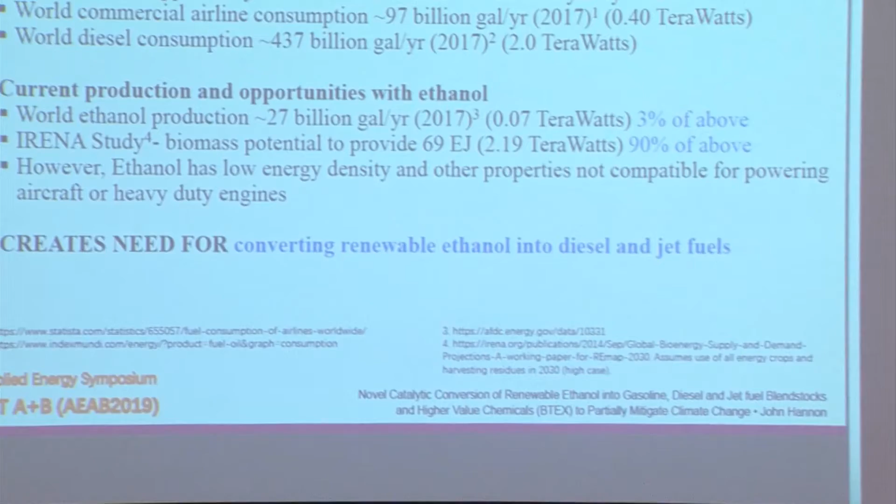We're looking at heavy-duty transportation vehicles here, airline consumption, 97 billion gallons per year, 2017, which represents roughly 0.4 terawatts. Terawatts being 1 times 10 to the 12th watts. World diesel consumption, just short of 450 billion gallons per year, representing about 2 terawatts. So that's what's used out there now.

The only, and we're shifting gears to down here, the only real impact we've made for biofuels over the past, say, 4 decades has been with ethanol. So with ethanol, the world production is roughly 27 billion gallons per year, but that only represents about 3% of the requirements that are above for heavy-duty vehicles on an energy basis.

There are studies out there, the billion-ton study in the U.S., as well as this recent IRENA study, that mention that the biomass potential is huge out there. So if you convert all that biomass into ethanol, you can reach about 90% of the above requirements. However, ethanol has low energy density, and it doesn't have suitable properties for powering aircraft and heavy-duty

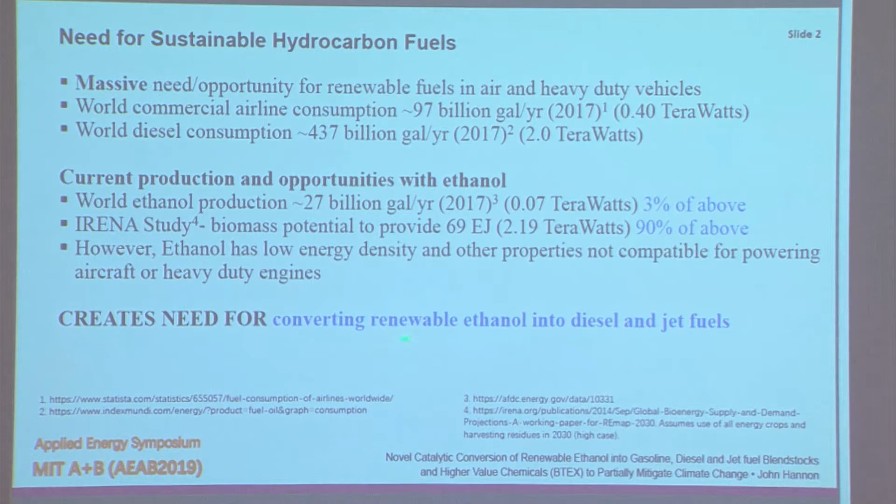engines. So it really begs the need for, okay, are there ways to convert ethanol into these other fuels? And so this is where we come along, Vertimass. So we licensed the technology from Oak Ridge National Laboratory; they invented this catalyst that converts ethanol into these heavy-duty fuels. We call it the consolidated alcohol dehydration and oligomerization process, in short, the CADO process,

where you take ethanol, it can be hydrous or anhydrous ethanol that comes through. We send it through a vapor phase heterogeneous catalysis with low-cost metal exchanged zeolite catalysts, and we produce a combination of aromatic and aliphatic hydrocarbons. We call it a blend stock. Currently, the blend is about a C4 through C12 hydrocarbon.

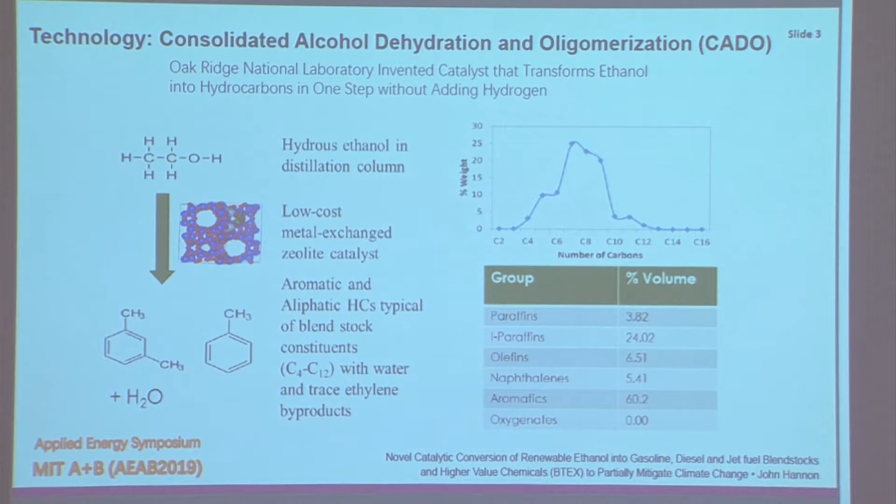You can see how it maps out here on the hydrocarbon. We have a significant amount of aromatics in this, as well as paraffins. So it's a combination. I'll get into this in a little bit more detail. But that's the basics of the technology.

And so if you look just schematically, what this now enables is ethanol producers, existing or new facilities that take in biomass or corn or sugarcane. They ferment it to make their broth and then distill it off. Now the ethanol producer has the ability to make ethanol if they want to, or they can run it through our CADO converter to make these different fuels.

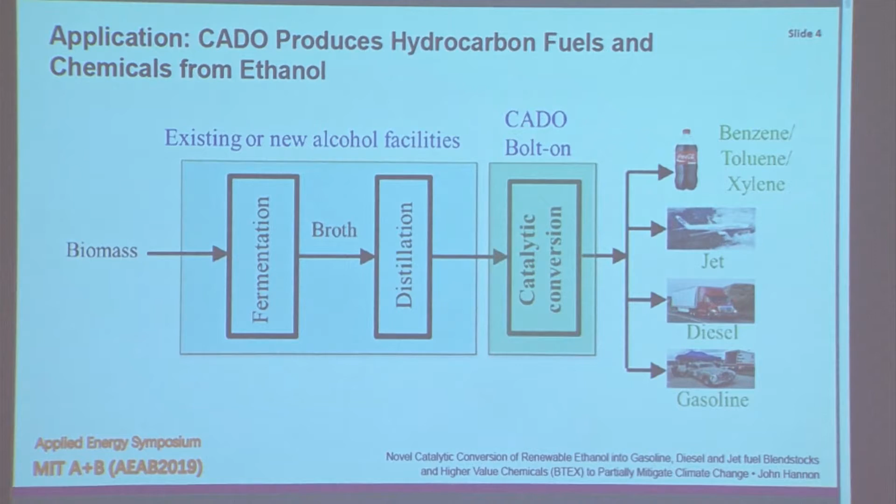So you can make gasoline, diesel, jet fuel, as well as this plastic precursor BTEX, benzene, toluene, xylene. There's ethylbenzene in there as well. These are used typically to make plastics. There's hundreds of uses of these chemicals. But that's in a schematic what this technology now enables.

So I'll talk a little bit about some of the technical advantages of this technology, as well as some of the commercial advantages. So some of the technical advantages are: it's a single cell, it's a single reaction system, okay? We've seen attempts at alcohol to jet or alcohol to hydrocarbons in the past, and these have typically been 3 to 4 step processes. We also have complete conversion of ethanol. All the ethanol converts into hydrocarbons and water.

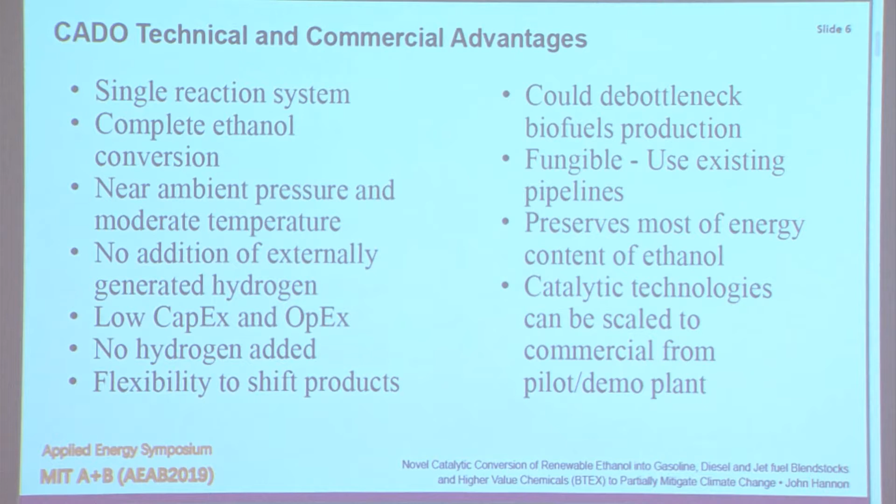So on the commercial advantages, we find in talking to ethanol producers out there today is that this technology can actually, in a lot of the plants, de-bottleneck it. A lot of these plants have bottlenecks at the distillation or rectification column. This allows them to de-bottleneck and actually make more product overall. It's fungible, to go to Buzz's comment about the ethanol not being able to go into the pipelines, where this can, because this is now a hydrocarbon product. As I mentioned, it preserves most of the energy content of the ethanol that is sent in. And then the other interesting piece I'll get into in a bit is this technology can be scaled up commercially from the current demonstration reactor.

So I mentioned we license this from Oak Ridge National Labs. It's a 1-step versus 3 to 4 for others. Very positive freedom to operate. We licensed 5 initial patents back in 2014. On top of that, we've added 5 more. 1 has been recently issued. We have 4 more under review. And then we have some funding support from the Department of Energy, BETO office, as well as the ChemCat Bio program, which allows us to really characterize a catalyst with all the sophisticated tools across the national labs.

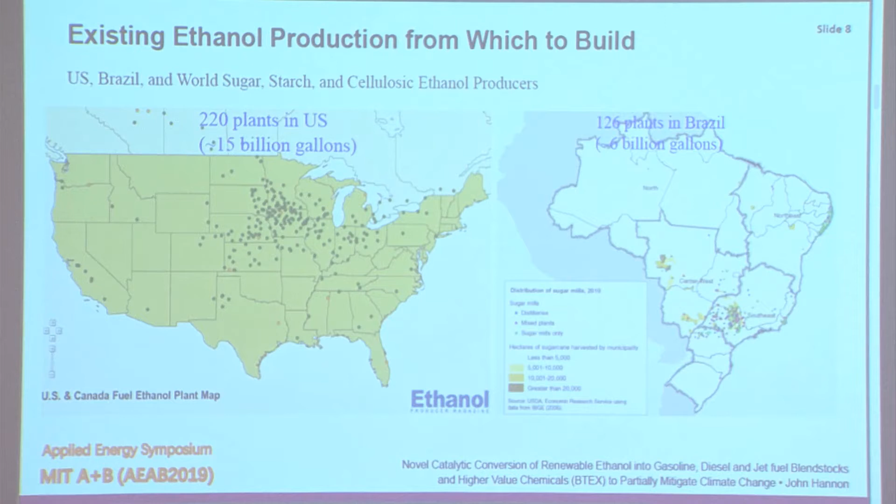So that's Vertimass. One nice thing we love about this is that we really can launch from a solid platform that's out there already. In the United States, about 220 ethanol plants producing about 15 billion gallons per year. There's only a couple cellulosic ethanol producers in this mix, but it's predominantly first generation or starch ethanol production. And then in Brazil, we get about 6 billion gallons total from 126 plants, and you can see how they're scattered about. This really gives us a nice platform to launch from, to start integrating our bolt-on onto these facilities to start making these renewable hydrocarbon products.

When we were awarded the Department of Energy award, we looked around for companies that could help us scale up this technology, and Technip FMC was right on the list. They're actually just around here in the Boston area. What we really liked about them is they've got about 4 decades of experience scaling up catalytic technologies like this. They've commercialized 20 processes from this laboratory that we're working with now. So they have a great success rate, and they also have the capabilities of large engineering firms, so they can provide engineering, procurement, and construction, or EPC packages.

And the other neat thing that we really liked is they're able to scale up commercially directly from this demonstration reactor that we're working with. So they can guarantee this scale up. That's a big game changer, because typically in other processes you'd have to have a unit that's installed in the field, and that usually bleeds you of finances. So being able to go directly to commercial is huge.

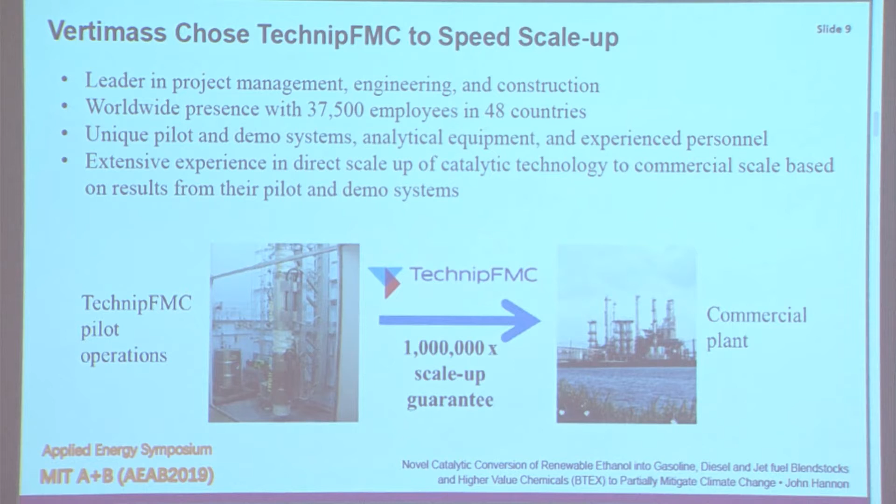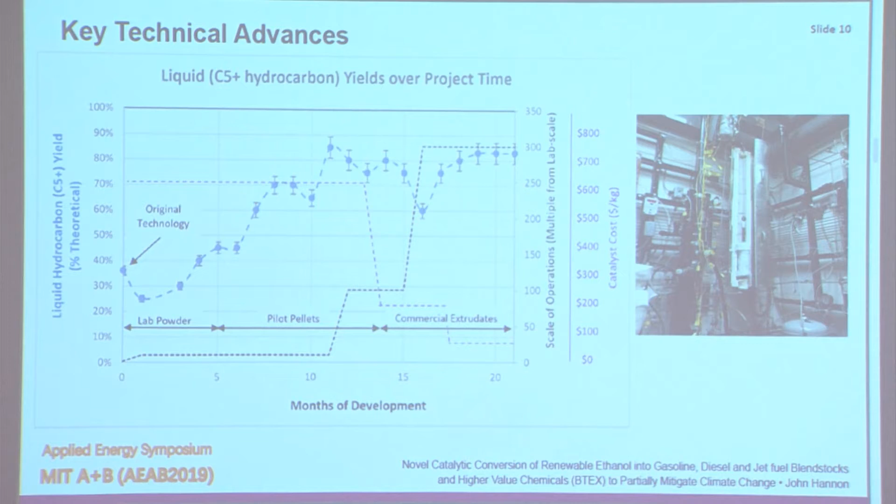Okay, so I'll cover this a little bit quickly here. So 2 graphs here just to show you the type of products that we have, the CADO reactor products. On the left here, this is an example of hours on stream of operation. Okay, so this is 0 to 70 hours. The dashed vertical lines represent the regeneration times, and then you can see how the product distributions look. This is liquid hydrocarbon yields. The green dots are the BTEX yields, and then we look at methane and a whole bunch of different other products that are in there that I'm not showing.

And then, if you do take a sample of this C5+ liquid, this is what the profile typically looks like, going from a C4 hydrocarbon to C12, and it's broken down by color here, aromatics being the predominant one in blue, followed by aliphatics and olefins. So that gives you an idea of the breakdown of the liquid.

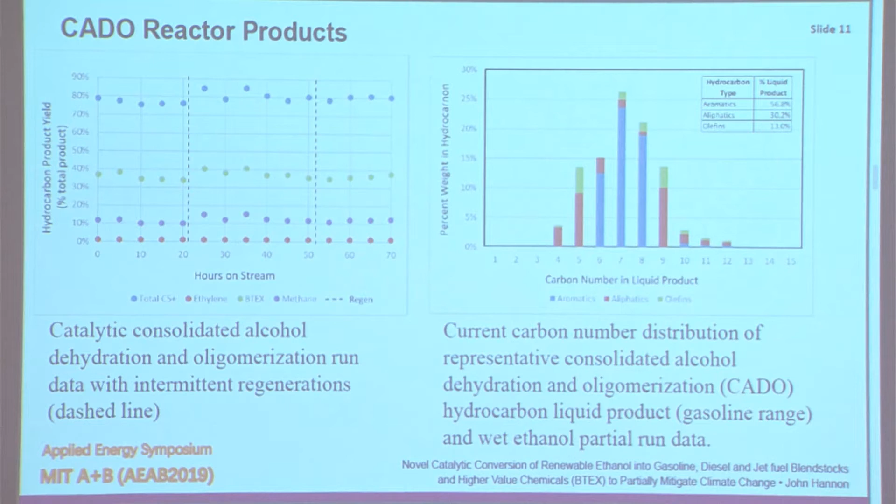The other thing we did in this recent study was look at 2 things, and Lee alluded to this during his presentation, but if you look at this complete top box, this is the ethanol production process. You get your process up front, and this is more the downstream processing where it goes through a beer column, rectification, molecular sieves, and you get your 100% ethanol product. That's BAU, business as usual.

This bottom piece here is, okay, how would we integrate our CADO bolt-on into this system? We have 2 blocks shown here with some heat exchangers, a reactor decanter, and we make our fungible fuel blend stocks. And this is how we see it integrating, with a little bit of heat integration. And then we look at a feedstock of 40% ethanol, which is typically what you'd see off a beer column vapor. Those are the 2 scenarios. So we're looking at 100% ethanol and comparing that to how much it costs to make fungible fuels.

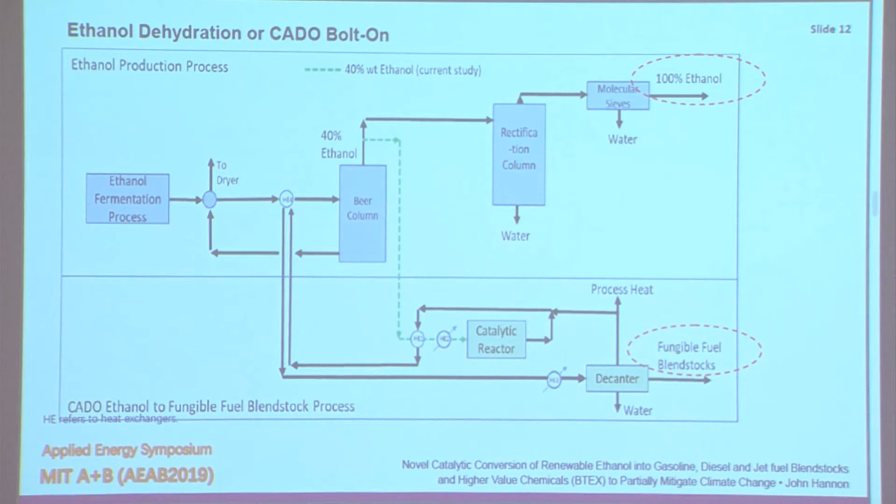And what we found is, looking at the y-axis here, when we started off, it was about $24 per gigajoule. And just to give you a sense, it's about $1.25 per gallon for just the conversion process. Over the development process, we were able to take that down in about 2 years to about 1/10 of that. So we're down at about $2 per gigajoule, or just about 10 cents per gallon for the conversion process.

We project that we're going to be able to get even lower, to about $1.44. And as Lee mentioned, this is very important because to take 40% ethanol and to convert that to 100% ethanol requires $1.46 per gigajoule, where we're currently at 2, targeting 1.44.

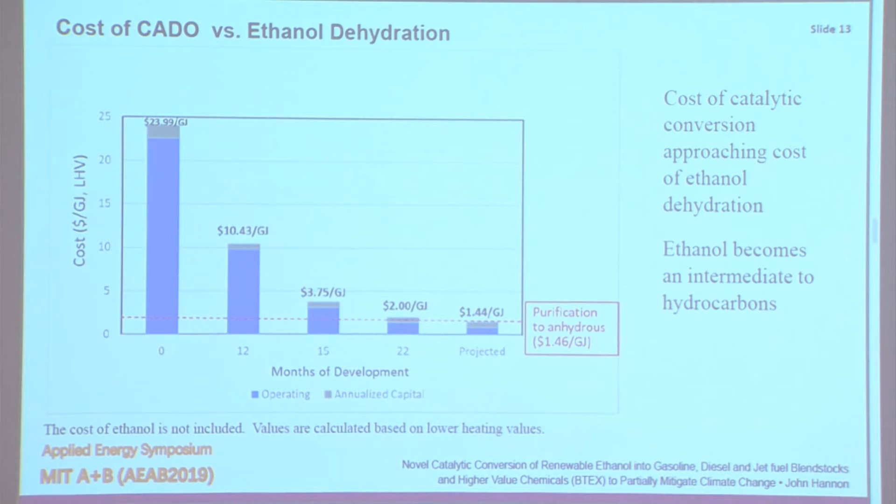So what we're saying is that there's the same amount of cost to take 40% ethanol to anhydrous ethanol. It's the same as taking that 40% ethanol and converting it to hydrocarbons. So this kind of just shows you here, same thing, 146 for this conversion process here. Now we're at $2 for this conversion, taking that 40% ethanol and upgrading it, and 144 projected. And the key here is the ethanol is now not really a product, it's an intermediate. So think of it in that sense.

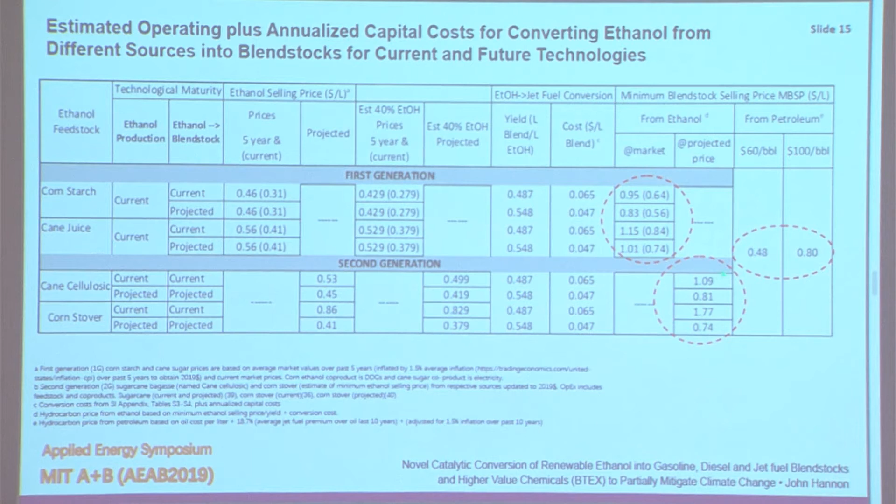The other thing we looked at was, okay, so you can do this, how competitive is it with petroleum-based hydrocarbons? We've done a lot of numbers here, but I'll just cut to the chase. If you compare it to petroleum, which these are in dollars per liter, so 0.48 at $60 per barrel oil and $0.8 per liter at $100 per barrel oil, what we find is that almost none of these technologies compete at $100 per barrel oil without any incentives. It's very challenging though. None of them compete at $60 per barrel without incentives.

Now let's talk about incentives. There are incentives out there. On the left are the incentives that exist. So you've got D3 RINs for cellulosic ethanol, D5 RINs for sugarcane ethanol, and D6 RINs for corn ethanol. And there's also the California Low Carbon Fuel Standard. These are current incentives that are out there. And then there are other incentives that may be coming down the line. So we have a $100 per ton CO2 incentive that we looked at, as well as this oil industry shadow price where they look at $40 per ton CO2.

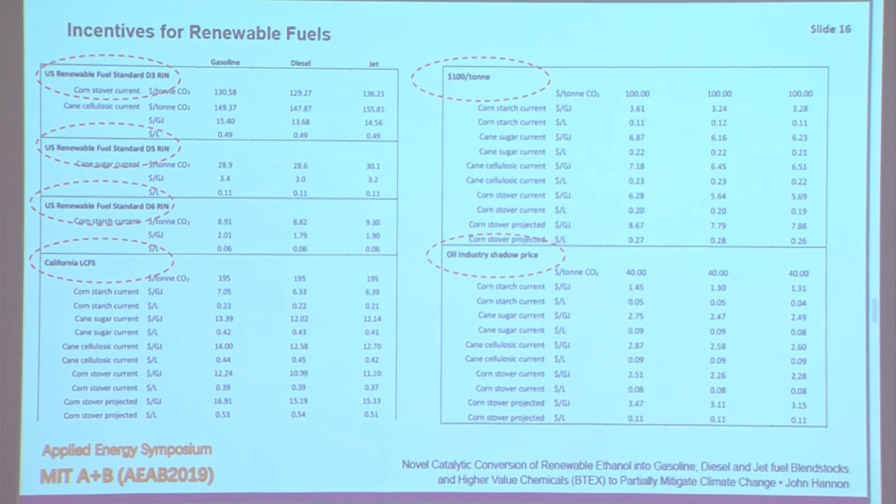The other thing we look at: all these prices are changing all the time, gasoline, diesel, jet fuel prices, as well as ethanol and certainly corn. These prices change over time. So we say, okay, if we do a look back, say over a 5-year time period, if the ethanol producer had this technology, would they be able to make money with it? And what we find is that yes, there are these windows of opportunity highlighted here in the greenish color, where if they do operate the bolt-on, their margins just skyrocket. So you can see huge margin increases, 30, 40% for these different opportunity zones.

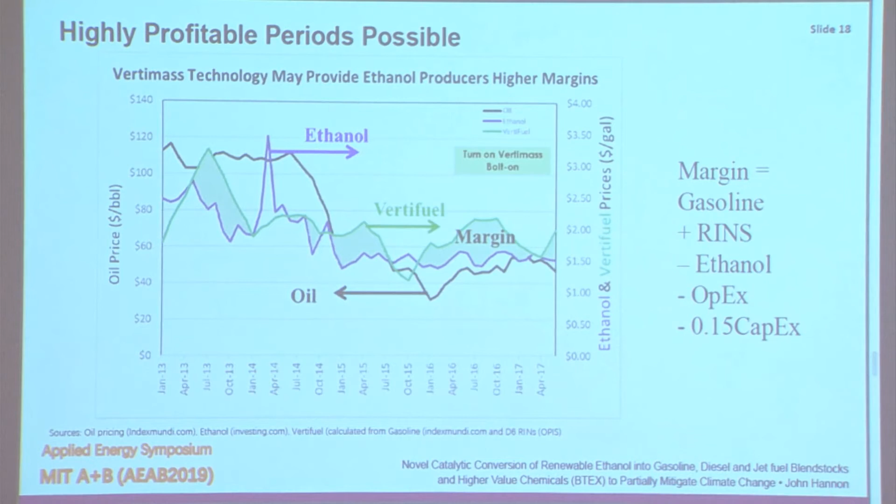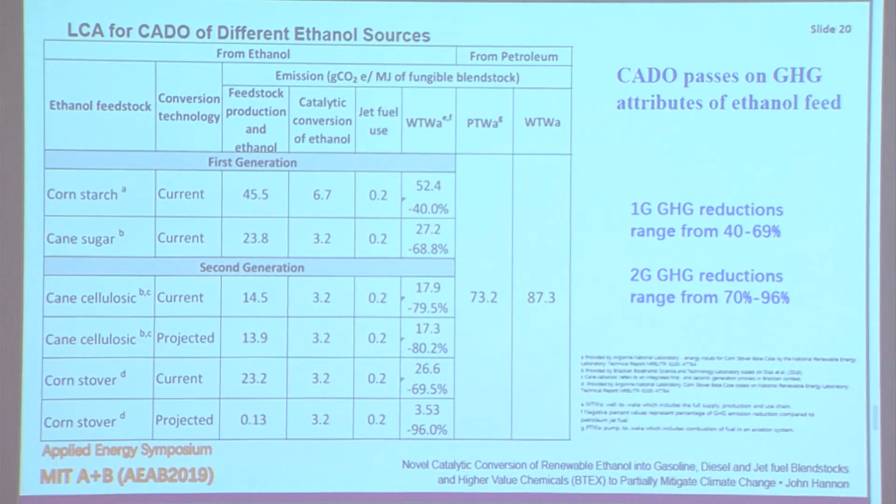We talked about the economics, and the last segment is about the life cycle analysis. So we work with Argonne National Labs to look at how the greenhouse gas emissions look, and this is just a schematic of the flows. And what we find is, for first generation, corn starch and cane sugar offer 40 to 69% greenhouse gas reductions. Moving to second generation production, it ranges from 70 to 96%. So really good looking greenhouse gas reductions.

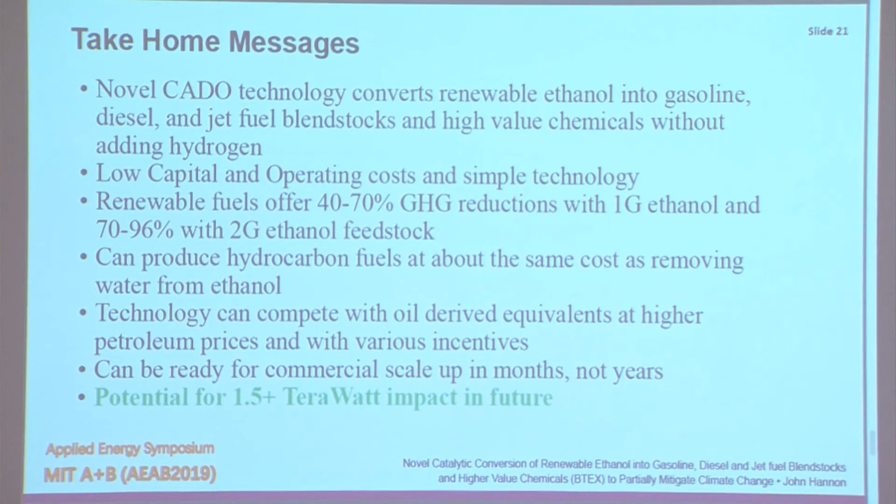And this is my final slide, just a recap, take home messages: this technology allows ethanol producers now to make gasoline, diesel, and jet fuel and higher value chemicals without adding hydrogen. It's a low CapEx, OpEx solution. As I mentioned, the greenhouse gas reductions are roughly 40 to 70% for first generation and 70 to 96% for second generation.

And the other interesting piece of that paper was, you know, you can produce hydrocarbon fuels now at the same cost as removing water from ethanol. These technologies can compete with oil prices, especially with the incentives. And then we're really close to commercialization. I mean, we've done this now for just over 24 months for the study. And so we're really close, about 4 or 5 months before we're ready to commercialize.

And then the potential here is huge. Potential for 1.5 plus terawatt impacts in the future. So that's all I have. Thank you so much for listening.

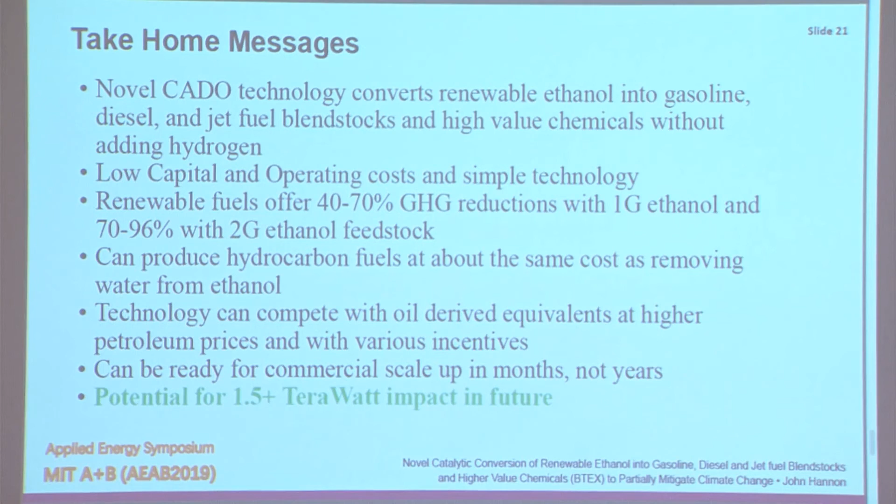We have time for a couple of questions. Thank you. Thanks so much for that talk. That's really, you know, promising. For this to have an impact on carbon, it would have to be coupled with basically enhanced inputs. And I think we all see that if this is based on corn, then is there also a plan or is there some future for increasing the production of corn? And if it's not basically based on corn, do you have a bolt-on plan for cellulosics?

Yeah, no, that's a great question. So we looked at all the feedstocks, right? So we looked at corn, we looked at sugar cane, and then we looked at the cellulosic feedstock from bagasse and then also from corn stover. So we looked at all those scenarios. However, out there in industry now, our feedback is, 95+% of it is corn production in the U.S., and then all of it is sugarcane in Brazil. And so that will likely be our first feedstock that will get our first bolt-on.

But that being said, once we optimize the bolt-on in industry at scale, that can be applied directly to cellulosic ethanol production as it comes along. But we find that the first generation producers have better financial positions now than cellulosic ethanol producers and have more kind of ability to put this on first. Yeah. But our target is cellulosic ethanol as the intermediate molecule.